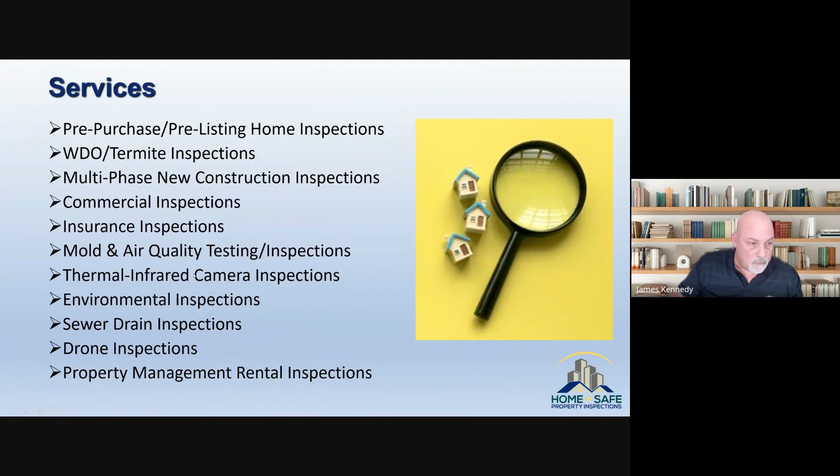All right, just about our services. There's nothing that we can't do or we don't do. If you can just peruse a little bit quickly, everything from home termite to environmental inspections, sewer scopes, drone inspections, property management rentals, as well as commercial inspections.

We have multiple trained inspectors, fully trained staff. So when your clients call us, we are going to educate them on every process: the residential inspection, the termite inspection. We're going to go over what the sewer scope inspection is all about. And we're actually going to go over the wind mitt and the 4-point pretty well in detail, so they have a full understanding how that works.

You're going to get the report back the same day. You can schedule online. We do have weekend inspections if asked early enough, by Thursday afternoon or Friday morning. Our insurance inspections and termites are done by us internally, so we'll get those inspections while we're doing the home inspection. And we do have inspection packages as well. So if there's, and we do home and termite, everything includes the wind mitt and the 4-point, and then we also have health, which would include any air quality, mold, asbestos, lead, water testing, etc.

This is something I wanted to go over with your team, not in depth, but if anybody has any questions on it, they can always reach out to us prior. We do offer now paying at closing for your inspections for the client. We would gather that information up front, a credit card to hold on file, and then we would do the inspection, and the client wouldn't need to pay for anything until closing. We would need to gather information with the closing company, etc. It's a way for the buyers to gain another paycheck or two in between the inspection process and their closing.

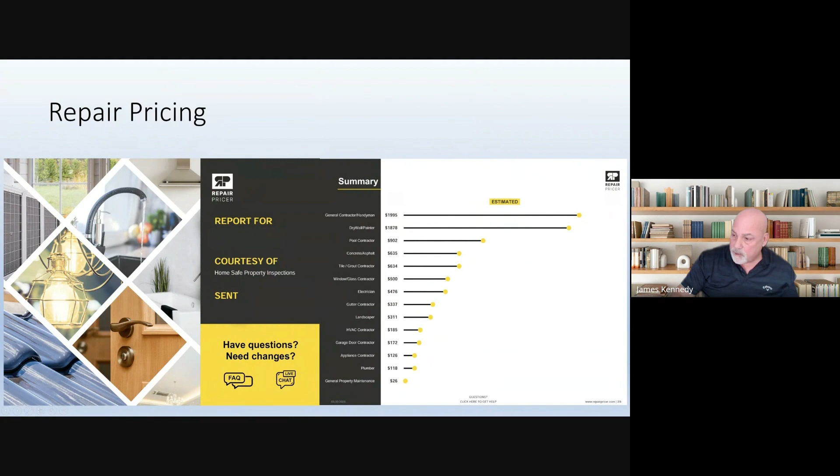As you can see, this home right here is one that we did, and you can see the kind of cost that they're estimated: contractor, handyman, HVAC contractor, general property management, property maintenance, and then a little bit more detail in that. You can check and choose and select what costs you want to share with the buyer. It's a really cool thing we've been offering for the last 6 months, and I've gotten pretty good feedback on it. This is the total here, $6,635. You can choose out the things that you think need to be addressed and leave out the others.

All right, home inspectors, let's start off with this. We're going to go over what home inspectors are required to do. It goes through DBPR, and we do need to be licensed. What does it take? It's going to be 120 hours of class and then a test. There's obviously a lot more studying that needs to be done in between, but that's really it.

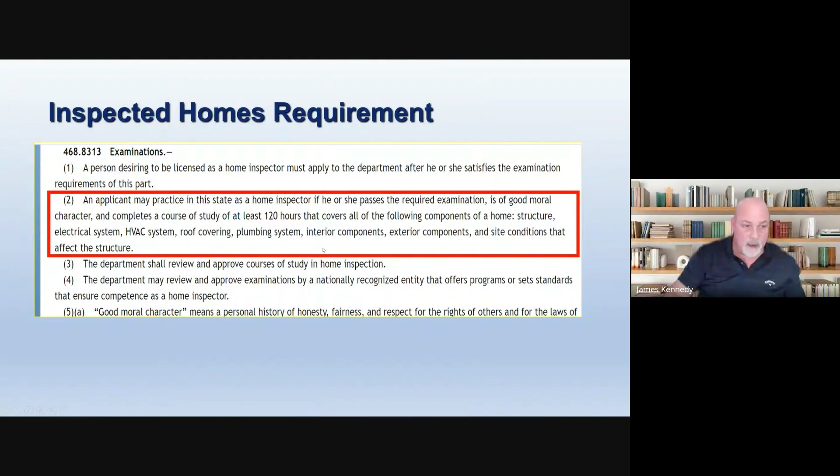So you can see once they pass the examination, fingerprint test, and do the 120 hours, it's going to be all about the components within the home inspection that we would do normally, and then you can have a license. So if you see somebody with a very high license number, you'd be looking at what they have done in order to complete their testing requirements.

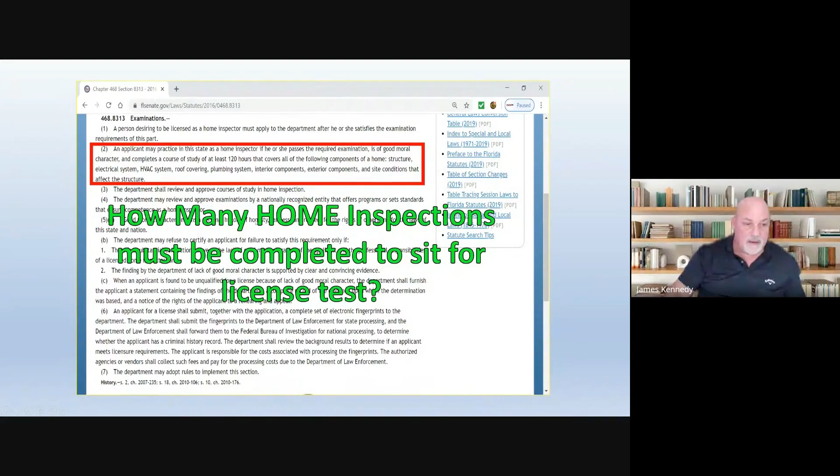So how many home inspections must be completed to sit for that license test? I guess you can all guess now—it's zero. So you may have somebody that could be very low in their pricing, and this could be the reason why. You don't want them practicing on you. You want to make sure you have a professional that has experience and has done many inspections.

Also keep in mind you may have somebody doing this as a part-time job, focused on insurance inspections rather than home inspections. You need to keep that in mind too. If they're working on their own, we know there are a lot of inspectors out there, so it takes time to build up experience. You definitely want somebody who's worked under the tutelage of a larger company that's given them the opportunity to do 300 to 400 inspections a year over the time they've had their license.

All right, so these are what we're going to go through. This is our table of contents.

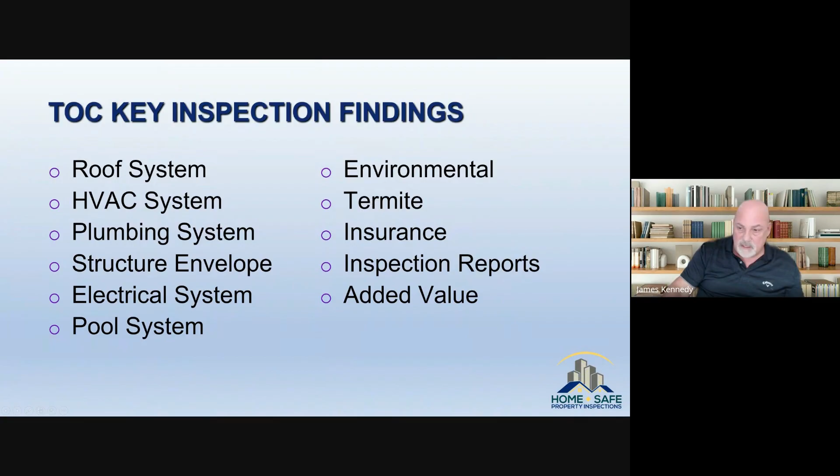I'm going to ask you to pull out your phone and take some pictures of some of the items I have. It'll be pretty useful for researching properties for your buyer to go look at, and it could also be useful for your listings as well. So these are the items we're going to go through. As you can see, there's a lot to cover, so we're going to jump right in.

All right, so for the roof, we're going to go over that. We have fiberglass shingle—to the left you can see the...

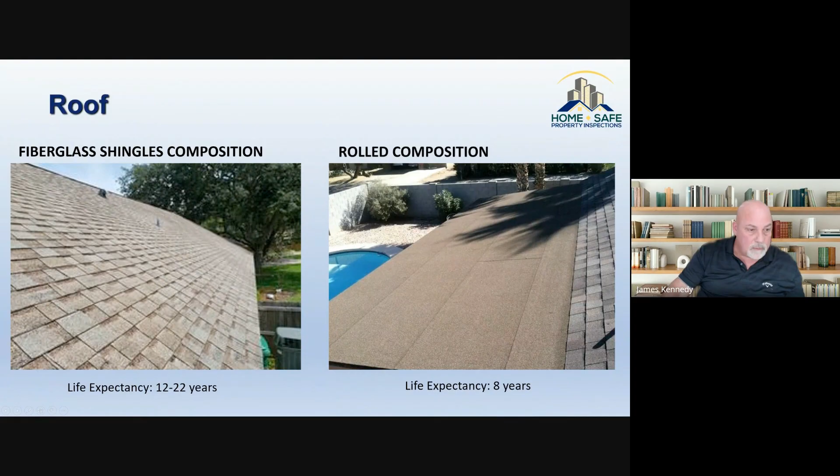Let's see, hold on one sec.

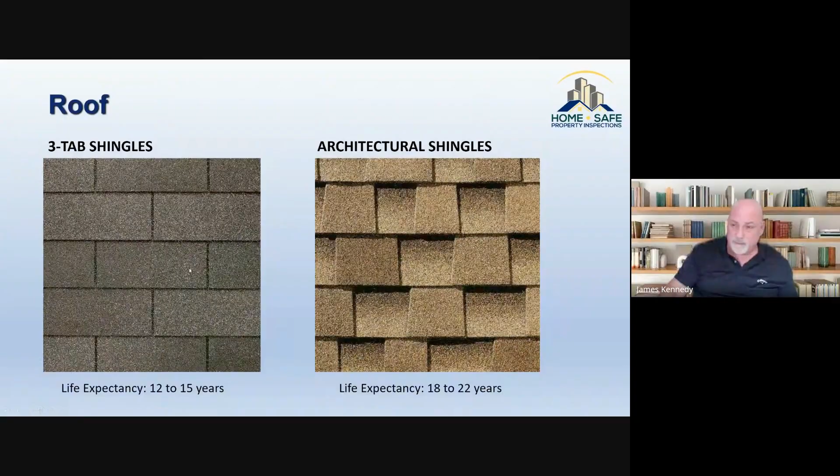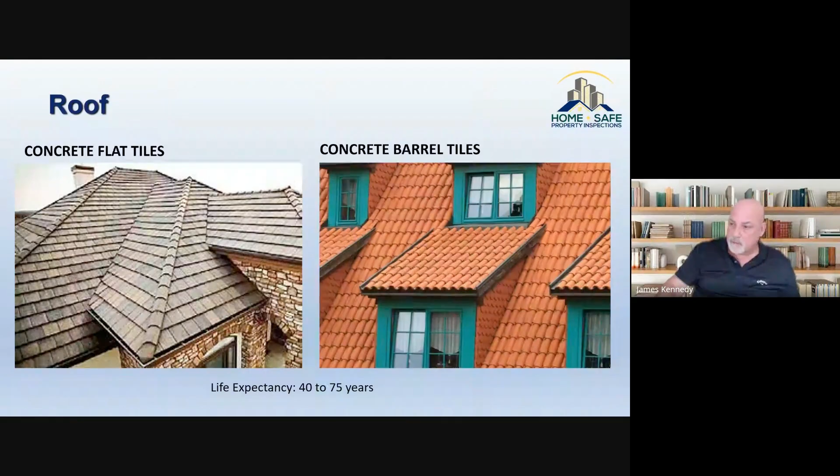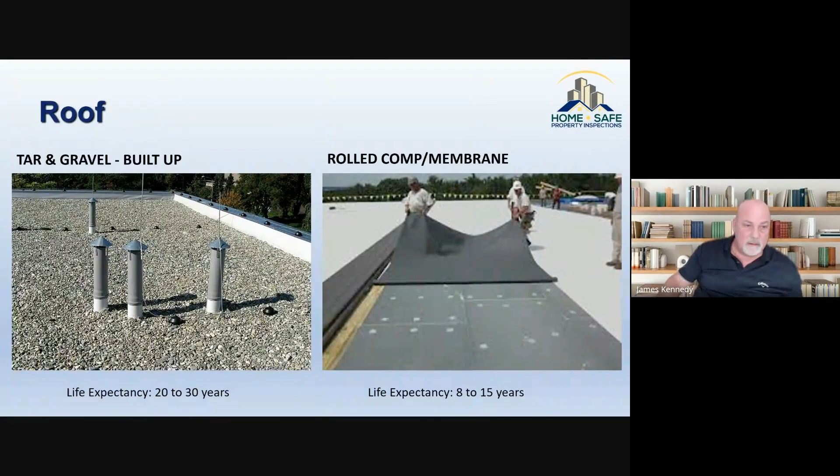Tar and gravel built-up roofing is obviously for more commercial buildings, with a life expectancy of 20 to 30 years. Then we have a rolled comp membrane, with a life expectancy of 8 to 15 years. Both of these would be more common in commercial properties.

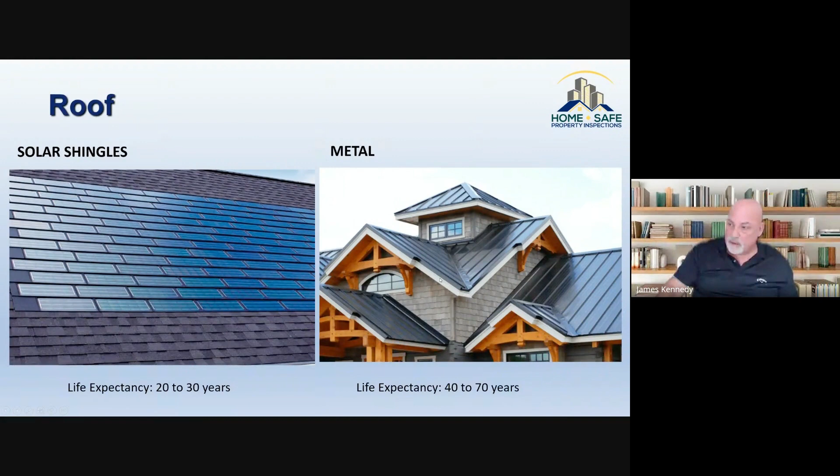Solar shingles, quite honestly, I've not inspected a home with these as of yet, but they are out there, probably more so in your blue states like California. Then there's also the metal roof, which we see much more down here, and that's 40 to 70 years for those, dependent upon the way the building and roof are sloped and structured.

Insurance carriers in Florida are stricter now. Asphalt roofs are often flagged at 12 to 15 years. You're going to want a home that has at least 5 years left on the roof for it to be accepted by the insurance company. But they're even looking a little more in depth at anything under 10 years.

Effective today, Florida now has more stringent requirements for your wind mitigation reports. There's a new report that needs to be used for the wind mitigation. Definitely make sure that if you have any inspections going out this week or next week, or even if you don't have anything for another month, the inspector you're using is using that new form. You don't want a hiccup at the end when you least expect it.

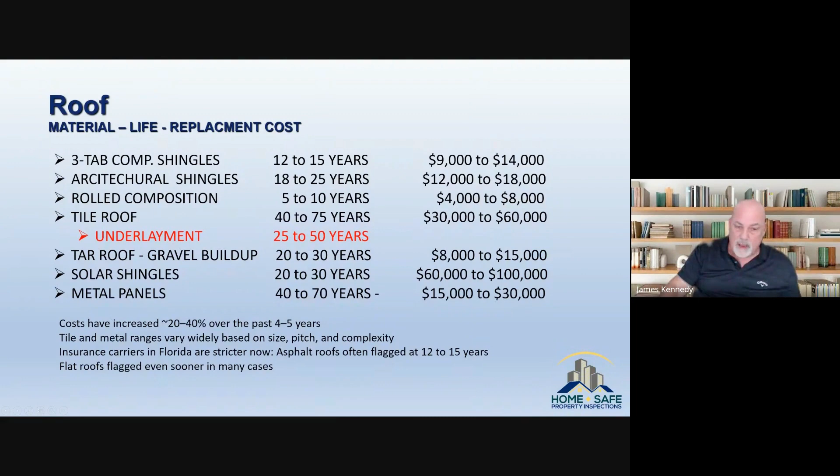So SWR, secondary water resistance, they're going to want to see documentation for that, or at least some kind of picture. Your secondary water resistance goes in between your decking and your roof covering, and it's very difficult to see. You actually have to have a little bit of a gap somewhere in the decking where you can see it, and you can stick a ruler in there to make sure it's pliable, that it's actually sticky.

Wind mitigation inspections - I'm sure many of you have plenty of these because you need them pretty much all the time. The discounts are going to be based on the roof age, not the condition. That's why they're going to require a roof permit date.

The length of the nails - they want 8D nails. When the inspector's in the attic, they're going to be looking for what they call a shiner, which is a nail that missed where it was supposed to hit. They're looking for a measurement of that to be 2 inches beyond the decking.

Spacing of the nails at the edge and the field of decking - those are going to need to be measured. They have to be measured out now, at least 4, in the new wind mitigation requirements, and they need to be 6 inches apart or less.

One of the biggest discounts for the wind mitigation report is the type of roof-to-wall connections. Older homes would have a toenail, newer homes could have clips, and now they'll use a single strap or double strap. There's certain requirements for those as well - they're going to have 2 nails on one side of the strap and 1 nail on the other side.

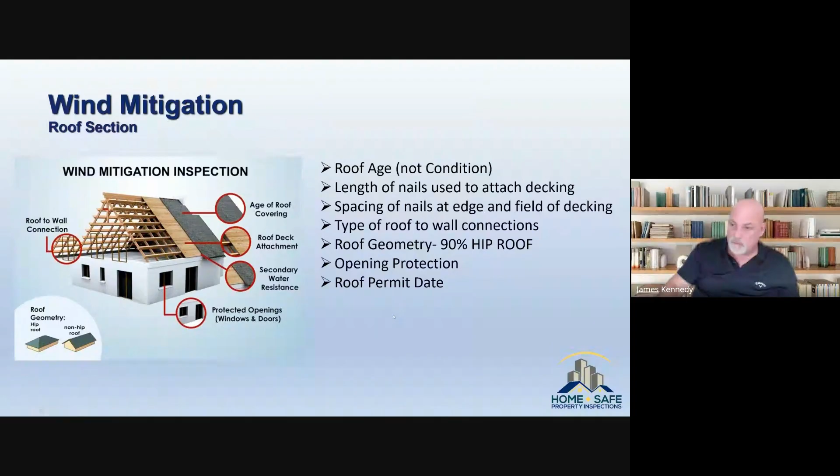Homes built after March of 2002 typically receive multiple premium discounts. That's when some of the codes changed. When a lot of the insurance companies were going to be leaving Florida, they came upon an agreement to use this wind mitigation report to allow for a variation of pricing for residential insured.

Homes older than 1965 typically will not receive the roof to wall attachment. That means it's not really secured with a clip or straps, and it actually gets downgraded to what we call a toenail, which represents just having 3 nails on the side of the truss into the wall - which was just the way they did it back in those days.

Homes between '65 and 2001 have about an 80% chance of receiving some sort of a premium discount. Average savings to expect are somewhere between $500 to $1,000, and that's in each of the 5 years that the report is good for. So the wind mitigation report is good for 5 years. Your 4-point is normally good for 1 year.

Any wind mitigation reports provided to you - if anybody has a sale that's probably going on right now, if it was prior to today, that will be accepted. But anything from today moving forward will have to be on the new report. So please keep your notes. If you have any inspections going on, make sure that inspector is aware.

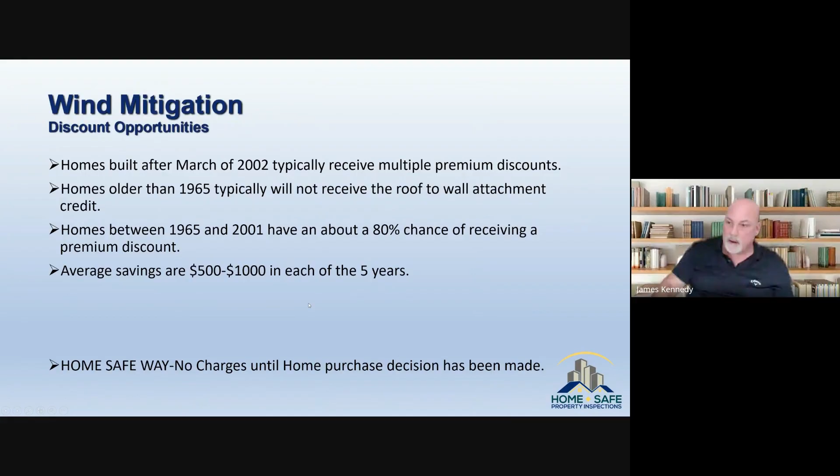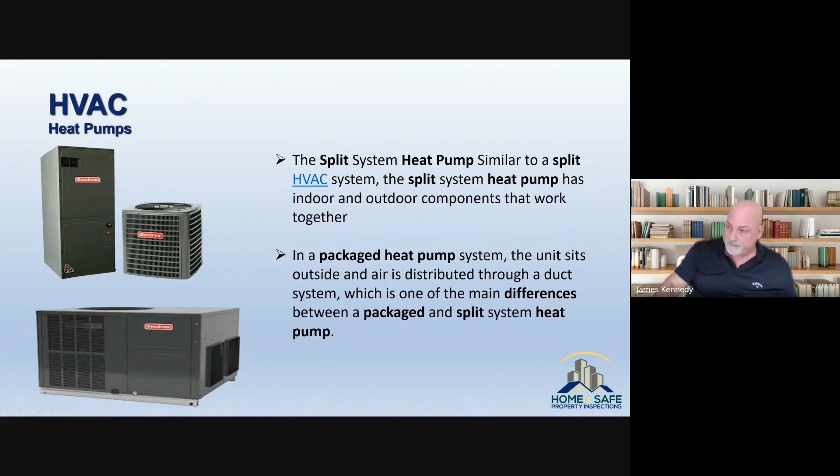New units do not last as long as they did back in the day. You've probably heard of Trane. Nothing stops a Trane. Some of the Trane systems can last up to 20-25 years. Replacement for these are around $6,000 and up, depending on the size of the home and the quality of the unit.

Heat pumps installed prior to 2009 require a coolant pipeline to be replaced due to the new coolant requirement. This was probably more important 3, 4, 5 years ago. Now, prior to 2009, we're looking at systems that are 10 to 17 years old, so we're getting to the point where these systems are already going by the wayside and being replaced, so it may not be as important at this time.

Minor issues and repairs begin at the 8 to 10 year mark. When we're looking at a unit, we're usually giving it a 10 to 12 year lifespan, anticipating 10 to 12, maybe 15. Anything beyond 15 years would be considered good fortune that it's still operating.

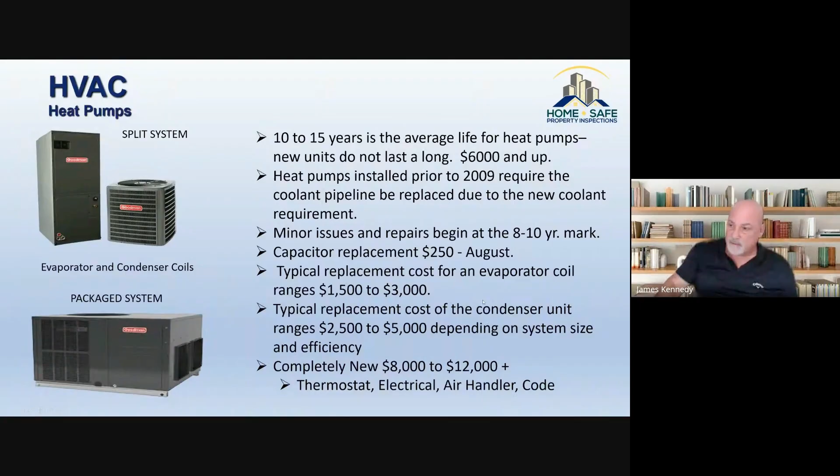All right, so now we're going to go into plumbing, and we're going to go over pretty much all the plumbing for supply lines, and then we'll go over drain lines as well.

Many of you have probably heard of polybutylene, which was used quite a bit from 1978 until 1995. Some of it did hang over past 95, 96, 97. You could have a home that has polybutylene in it. Most of these have been changed, but individuals who've owned a property prior to and are just selling it now may not be aware that the home has it.

So even if it does get replaced, there could be some kind of issue in that wall. As inspectors, when we see polybutylene, we look to see where it's being supplied to, and we look for any kind of damage or moisture issues before we leave that inspection. You're not going to know it if the seller's replacing these - they're going to take the wall down and change that drywall, but what's behind that drywall inside the framing could be ugly.

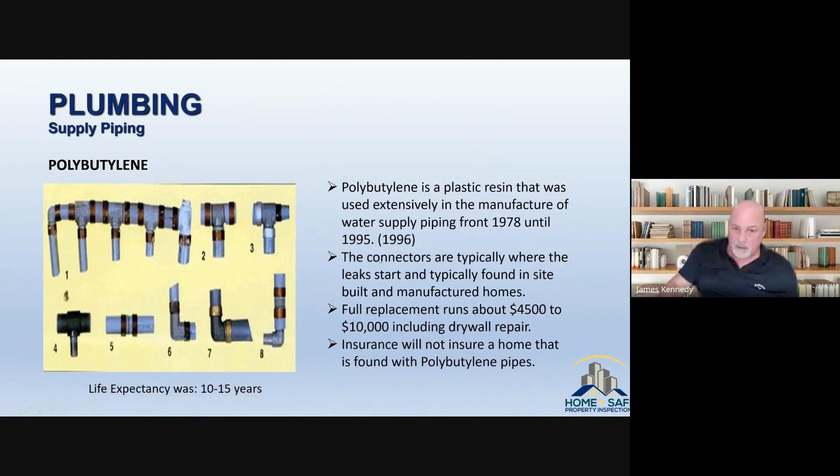If you went back probably 5 years ago, some insurance companies would insure it on the promise that it was going to be taken care of once the buyers moved in. That's not the case any longer. Same thing with electrical panels - there's really no leniency with the insurance companies these days.

All right, CPVC - it's high temperature plastic, invented for both potable cold and hot water in 1959 by Genova Products in Michigan. It's been used extensively in fire sprinkler systems since 1985, and it's also used for many industrial and process piping applications.

It can, over time, become brittle and susceptible to cracking. Life expectancy for this is around 50 years.

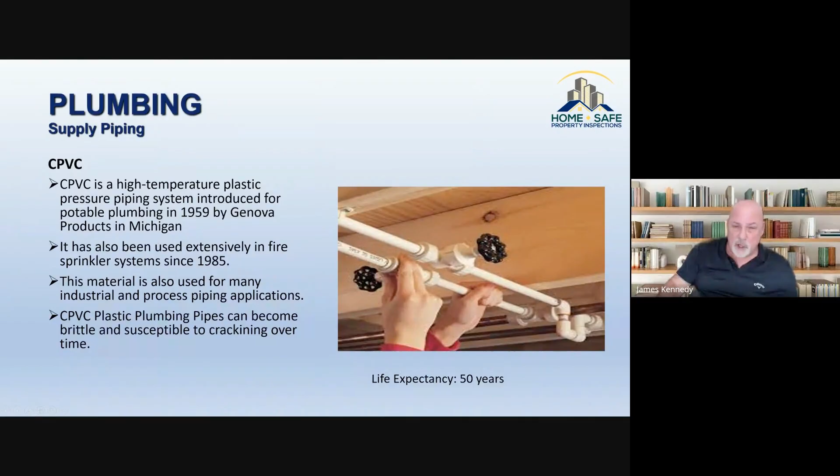All right, we'll have a chart at the end where you can take a photo of all those life expectancies.

Copper pipes, commonly used in the construction industry for supply lines and refrigerant lines, can be manufactured as soft or rigid copper. They offer excellent corrosion resistance and reliable connections. Life expectancy for these is 40 to 60 years. Eventually, they can get little pinholes in them as well.

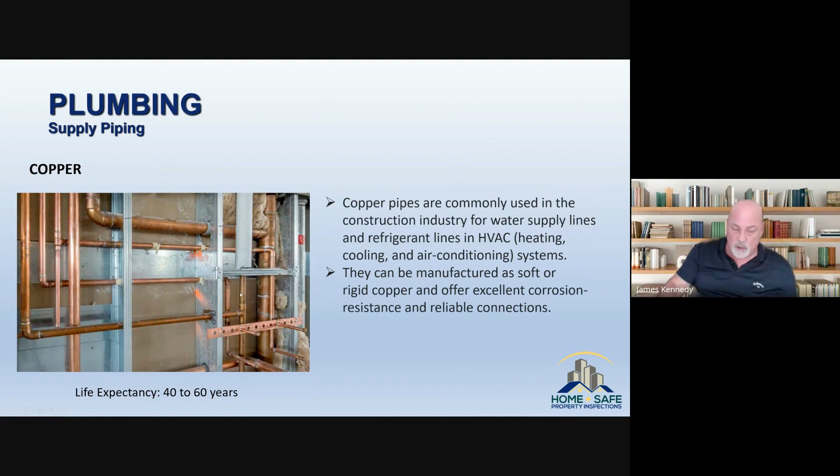So it's something to keep in mind. The inspector is usually going to give somewhere like 40 to 50 years. Anything installed past 1980 may be a concern, but a lot of times by that point, many of those homes have been repiped.

In the U.S., PEX has been used for radiant flooring earlier, and in the 1980s they started using it for potable water, becoming very prevalent in the mid to late 1990s. Life expectancy for PEX is 40 to 50 years.

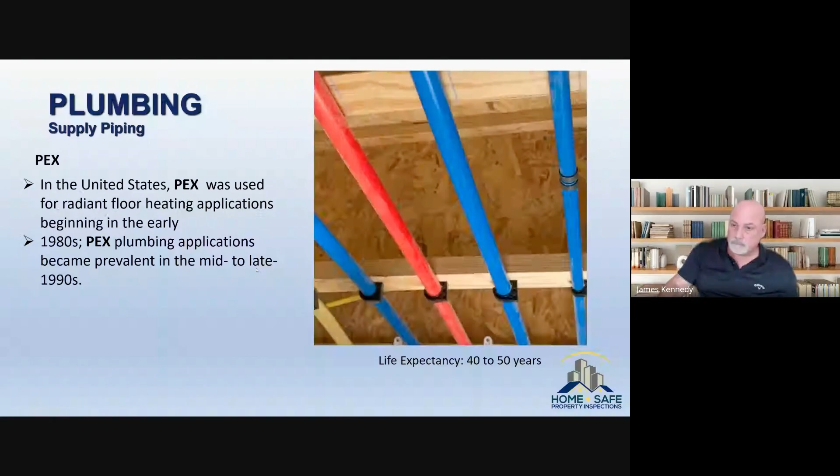All right, so galvanized steel plumbing pipes. These are made of steel, coated with zinc. They actually go through a bath - they form it, dip it, coat it with zinc to help prevent rusting, which is good for the exterior of it.

But as our next photo will show, on the interior there could be some issues. Life expectancy for these is 30 to 60 years, and these were commonly used in homes prior to 1950. It's probably used until the late 1960s.

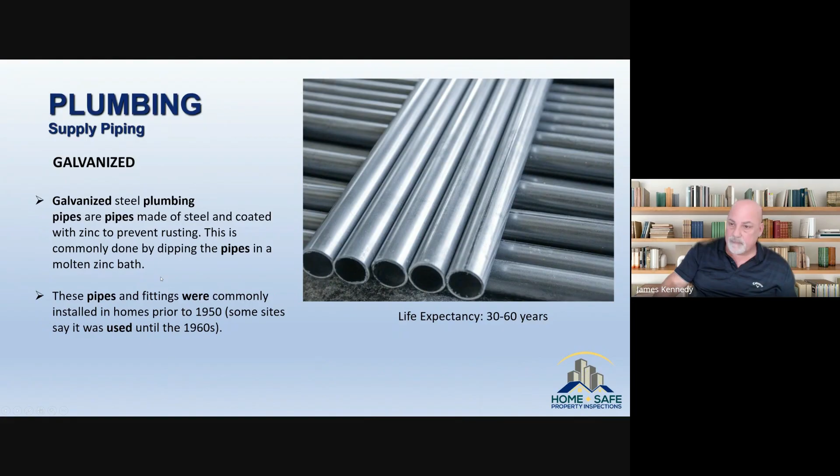Over time, the galvanized pipes can begin to rust and corrode on the inside, as you can see on the right-hand side. This was a situation where two different metals combined with each other in a chemical reaction - you had a copper line with a galvanized pipe, and you can see the corrosion that developed on the inside. It's not very visible because of the zinc on the exterior, but it could affect the water flow.

If you see varying water flows in different pipes or different areas of the home, it's something to consider and think about. Eventually, it could cause a rupture, and it could cause issues with flooding.

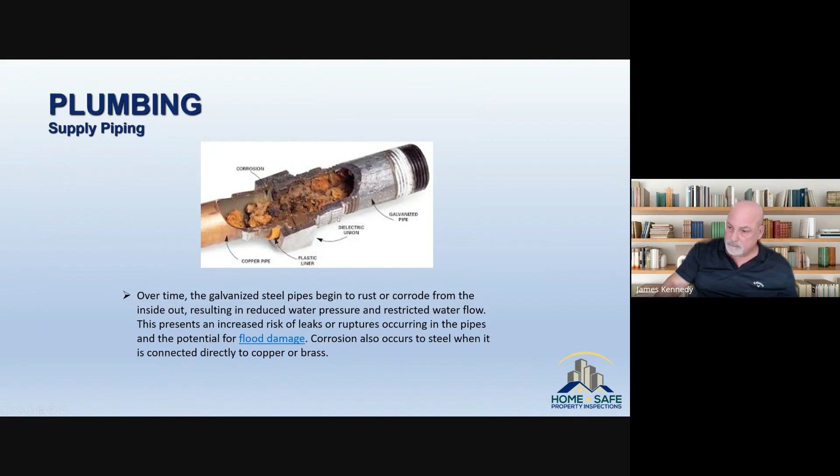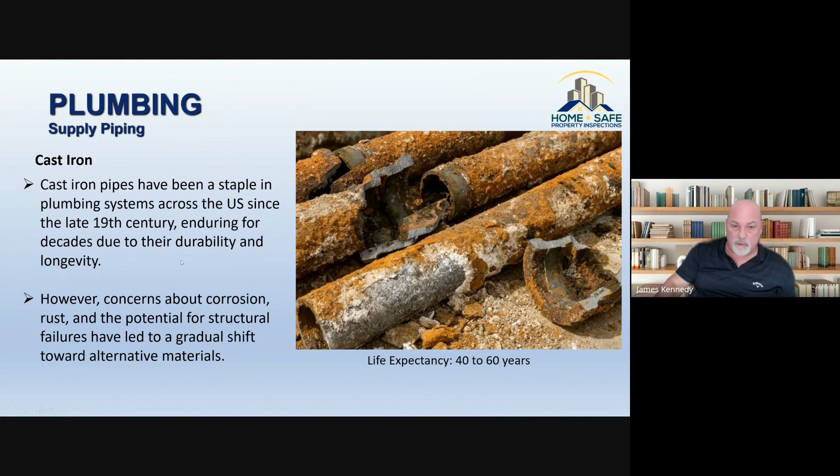And how we find that - for any home we see that's built in 1978 or earlier, we're going to recommend that a sewer scope inspection is provided. It's a tool with a camera on the end, put into the drain lines going to the road, checking the sewer line and also the drain lines underneath the home.

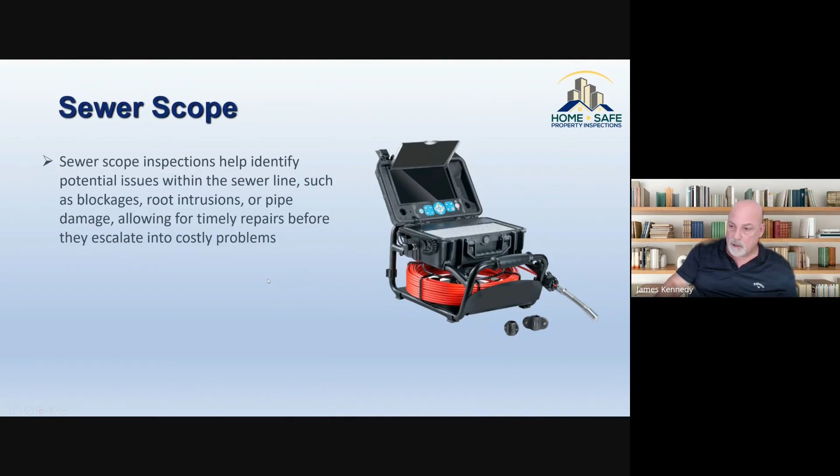Issues happen when the piping gets placed down - it looks great when the plumber leaves. However, they cover it with soil, and then they come put the sod on later, and they'll crush the pipe. It may not be a problem right away because you've got the soil going on, but it's eventually going to leak. And even if it doesn't, if it's just a cracking, roots from bushes, trees, or grass can grow in, and you basically have a great provider of fertilizer for those roots to continue to grow. We'll see a picture of that as well.

This is a blockage or obstruction that we've seen. Two weeks ago we had a golf ball in one of the sewer drains of a new construction. We've also seen dish rags and other things as well. I've seen joint compound used for drywall poured down the sink that got as far as the drain. We've seen balls of tape in the drain. I've seen a beer bottle upside down in a clean out.

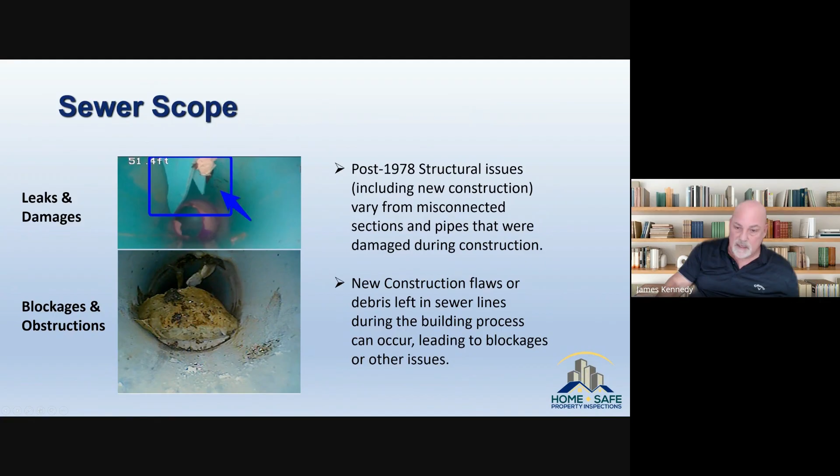So I definitely follow through and try to get those done as often as possible. I have 2 or 3 agencies I do business with, and they make sure they recommend it to every one of their buyers, and we'll actually run it. If the home is on septic, we'll still take it. If there's a clean out available by the septic, we'll put the sewer scope up underneath the house and check those drain lines coming from the bathrooms, the kitchen, and the washer and dryer in the laundry room.

Up on top, this is an example of root intrusion—roots that are growing in. On the left, on the bottom, this is an older home.

This is either galvanized or cast iron piping. You can see it's got some rust going on. This one's actually not that bad—it's still not going to affect the flow. I've seen them much worse than this, and it's not a deal breaker.

What needs to be done is it can be descaled. They can run a pipe down and run a rooter blade, and it will chip away at this galvanized piping. It may end up causing a problem, like a break in the line, but at that point it's just a repair, not a replacement of the lines altogether.

Cost for this could be anywhere—if you're going from the main house out to the road, it could be anywhere from $5,000 to $15,000, and underneath the house could be even more expensive.

New construction home in Sorrento last year was purchased. A sewer scope was not provided. They thought the toilets just weren't getting enough water going through the drains, but actually the piping wasn't connected correctly, and there was a lip causing a problem. It ended up having to have the tile floor taken up, and the cement had to be broken in order to get to the pipes and do those repairs. That was a $900,000 house.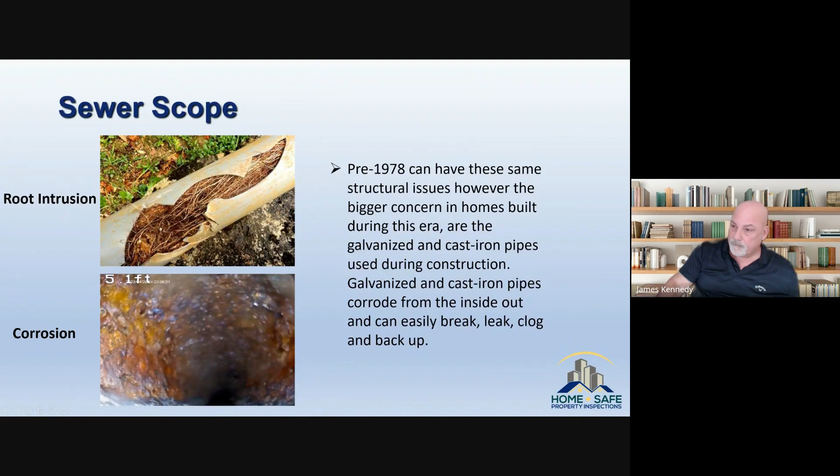I saw somebody was asking how they can determine polybutylene. You're basically going to be looking for those copper connections. It's going to be a gray pipe, usually a different color than your PEX, but there is writing on it. If you go up closer, you can see writing that would help you determine it. And if you ever have any questions, take a picture of it, get the writing on it, and send it to me in a text or to the business email, and we'll evaluate it and let you know right away.

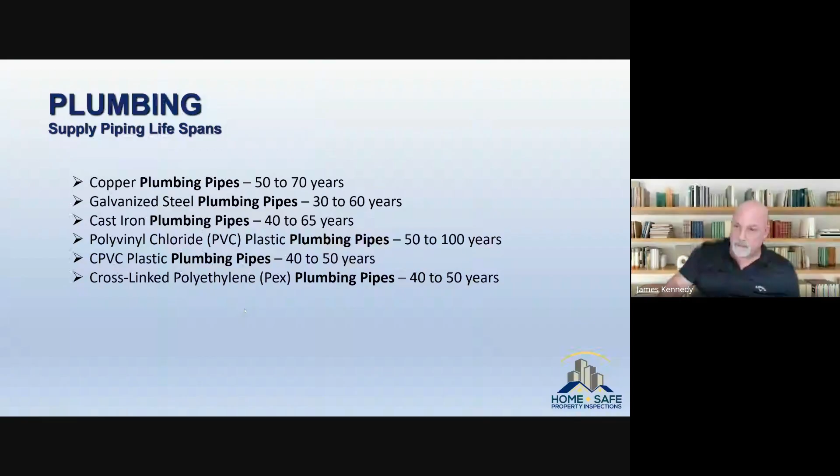As a home inspector, every time we see something like this we're going to recommend both have an evaluation by a licensed professional structural engineer. If we see something that's 1/8 of an inch thick or less, about the thickness of a nickel, the recommendation is to go ahead and repair it with unsanded grout. Anything over that 1/8 of an inch is where we ask for a professional engineer to evaluate, and other things may come into consideration.

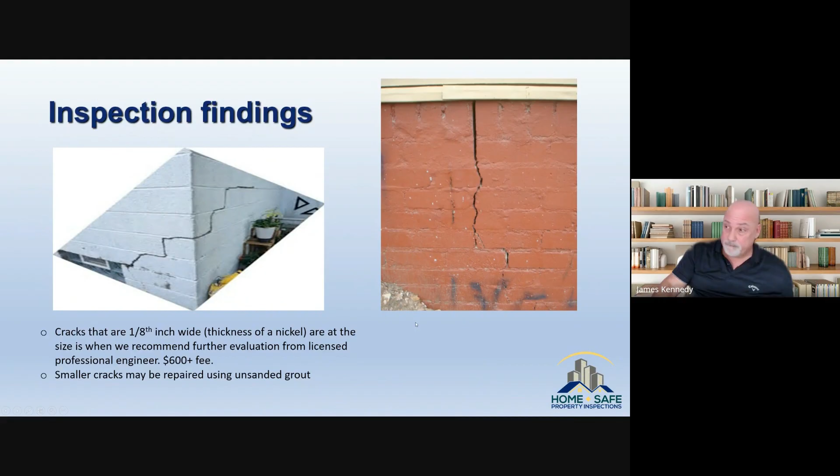One consideration is the age of the home. If we see something right at the 1/8 inch mark and the home is 50, 60, 70 years old, it may not be as important, and we may not recommend it gets reviewed by a structural engineer. But if it's 15 or 20 years old, we're definitely going to give that recommendation. That fee is usually around $600 to $700 minimum for about 40 minutes worth of work and a report.

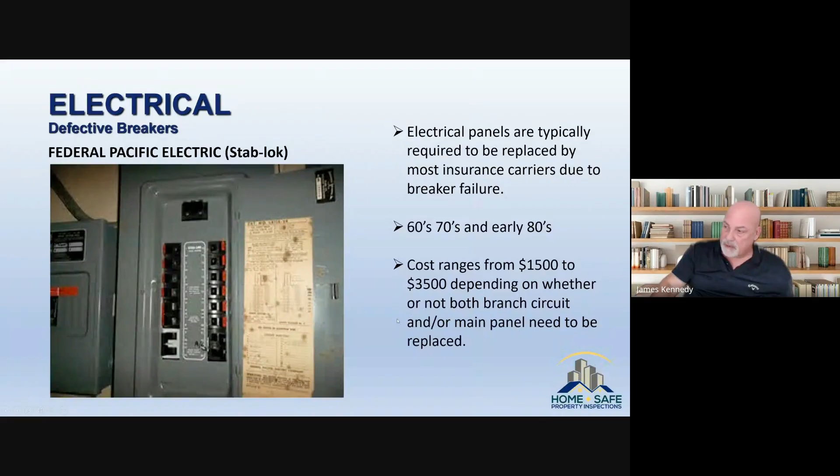In this picture right here, we see the Federal Pacific Electric panel, also named the Stab-lok. These were required to be replaced by insurance companies due to breaker failure. They were used in the 60s, 70s, and 80s. Cost for repairs can range anywhere from $1,500 to $3,500, depending on whether the branch circuits or the main panel need to be replaced. At this point, you're better off just changing out the whole system.

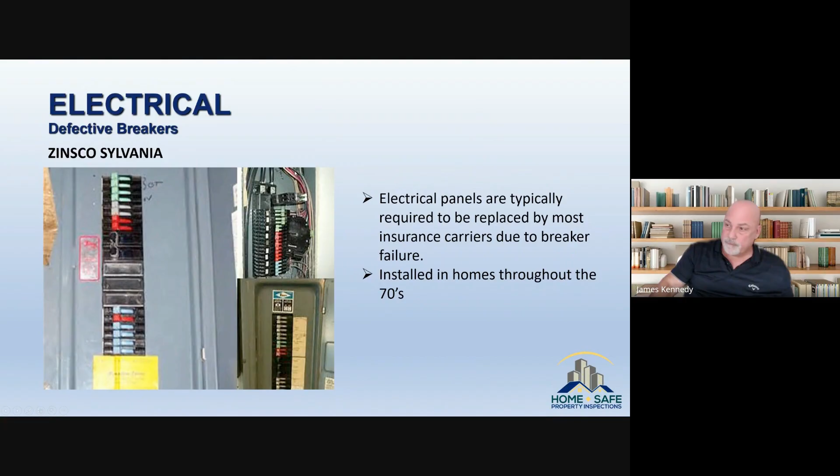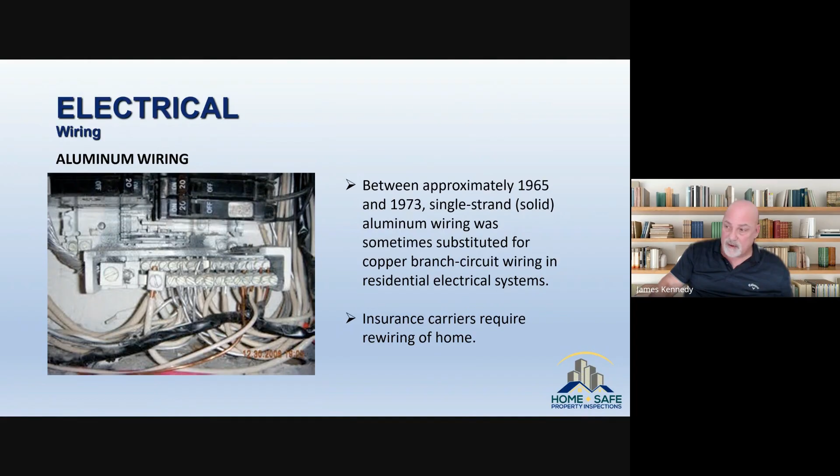All right, single strand aluminum wire was used from 1965 to 1973. Sometimes it was substituted for copper branch circuit wiring. Insurance carriers required the rewiring of the home, or for it to be fixed, they need to have these alumiconns placed on it, either in the electrical panel or at the outlets. This is usually connected to your light switches and outlets, and initially it was established that it was causing some issues.

The aluminum wiring is very soft and loosens up over time, and then it doesn't allow the connection to be as good as it could be, and it can cause a fire. These alumiconns take that single strand and hook it up to another wire, which eliminates that issue. And this will pass your insurance. Okay.

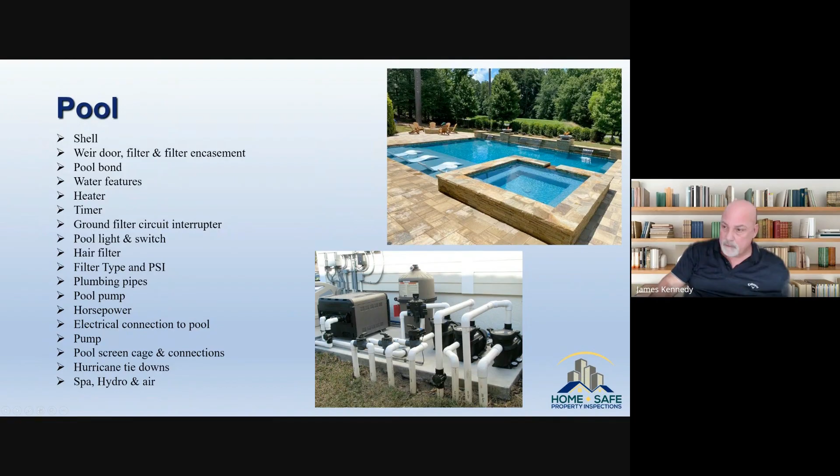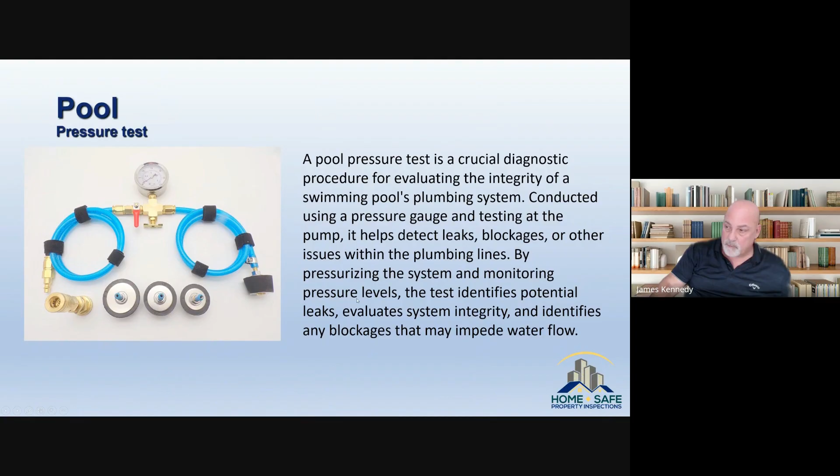This is something we've been doing the last 2 or 3 years. We check the pressure of the supply drains as well as the skimmer. We can't check the main drain, but we can check those other 3 lines. It's a diagnostic procedure that will let us know if there's any leaks, blockage, or other issues in those lines. We pressurize the system and monitor the pressure levels, and it identifies potential leaks.

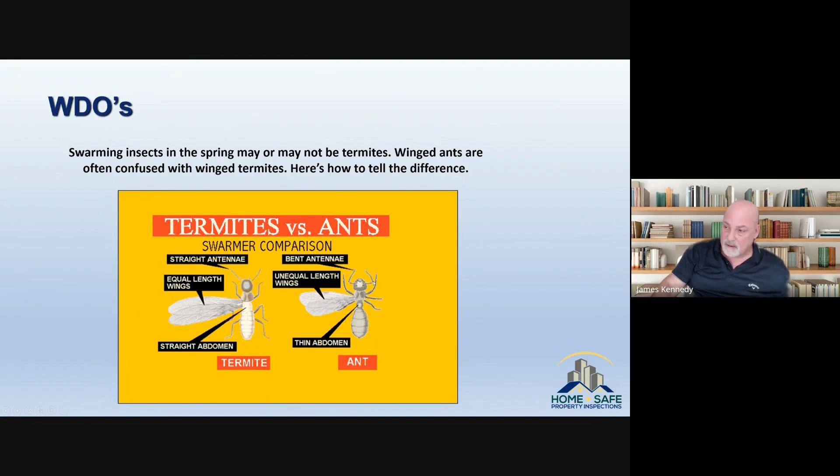We always recommend that you have a licensed professional pest control company come out and look, but some ways of determining it yourself would be a thin abdomen for the ant versus a straight abdomen for a termite. The wings on termites are all the same size on both sides, while the wings on ants are unequal in length. Also, if you can see the live ones, termites have straight antenna while ants have bent antenna. That's the difference between a termite and an ant.

Treatments involve liquid treatments, creating a barrier that prevents termites from entering. There's also, you can have like the Massey-provided Sentricon bait stations. You just want to make sure that there's active ingredient in all those bait stations.

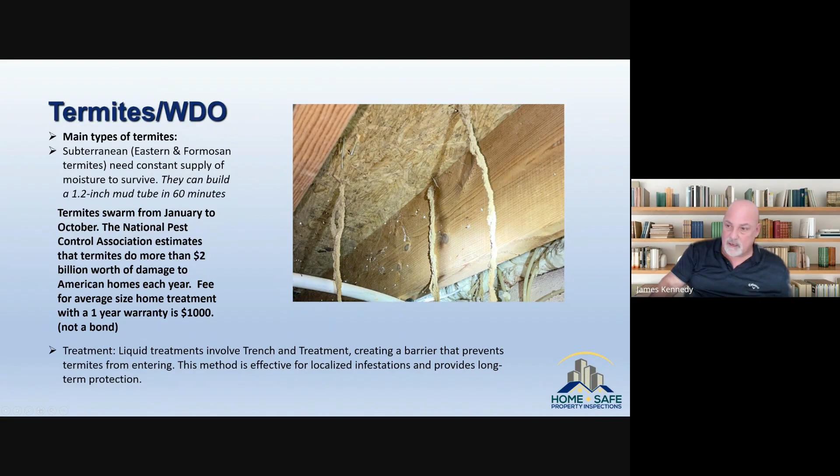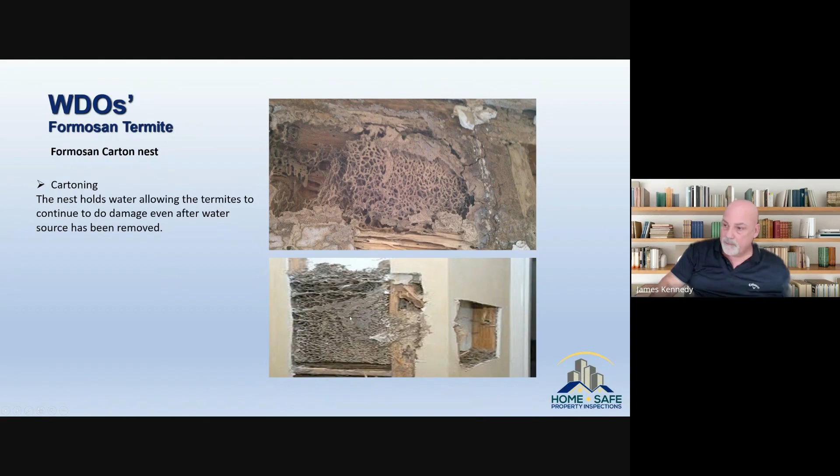This is cartoning. This could be behind the wall. This is from Formosan termites, which came from Asia back in the early 1900s, and they came over on ships. You can see quite a bit of damage, and these can go quite a bit. They hold a lot of water in here, so the termites don't have to go down to the ground as often to pick up water to continue to survive. We call this cartoning, and this is for Formosan termites.

Drywood termites are not taken care of by the subterranean preventative treatments, so the bait stations do not work on drywood termites. The treatment on the outside does not work either. There are 3 ways to treat drywood termites, and you're going to need a responsible inspector to tell you what those are. One is, if it's in a small location and you're pretty sure it's pretty new and hasn't gone to other locations, you can remove the wood that it's in.

If the inspector sees frass on the outside framing but doesn't see any frass in the attic area or crawl space area, then maybe just removing the framing would suffice. If there's termite frass in several locations in the attic, they're going to want to start off differently. If there's just a few areas in a location, there is a foam that can be applied to that wood area - it gets injected into it and will kill the drywood termites.

The last option is going to be fumigation of the home, which requires 3 days of tenting - 1 day to put the tent up, 1 day to gas, and another day to take the tent down. You definitely do not want your buyers dealing with this 3 months down the road after they've moved into the house, because everything that involves eating has to be either washed or bagged up before the process, and they need to move out of the home for 3 days.

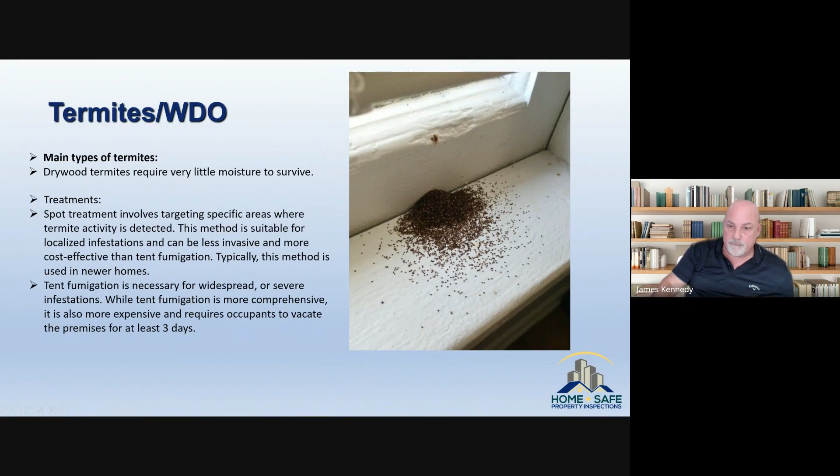Drinking water tests - we provide these. Many of the VA loans are going to require this for anybody who has well water, and some FHA loans will require this as well. You want to make sure that you have somebody that knows what they're doing.

Some things that can give you a contaminated test that isn't really deserved would be somebody not wearing gloves when they're doing the testing and actually touching the water. Another one is not letting the water run long enough before they actually test it. Another is also going to be cleaning the spout itself where the water is coming from, making sure, because that spout could be holding residue or contamination from a long time before.

There are 2 different tests. One is for contaminants and bacteria. The second test would be for metals, including lead, iron, and manganese.

The results of this, if you do the first test only, it'll come back in 24 hours. If you do the second test, the bacteria and everything all together, we call it the VA FHA Plus test, that will take 48 hours to come back.

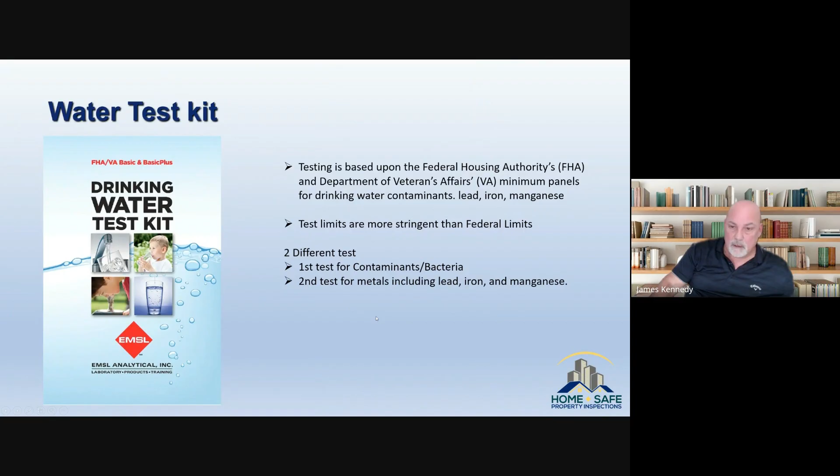Cost for this from the lab is $175 to $200. So the inspector should be along that price line of $425 for a standalone. But if there are a lot of inspections put together, it should be part of a package deal, down to like $375 or $350.

Mold, well, we all know the mold, the 4-letter word. Not everything is an issue. It needs to be checked out by the right individual and determined. There are several ways. I am a licensed mold assessor, which means I've had to perform a certain number of tests, worked for a period of years, and then pass a 4-day class to get.

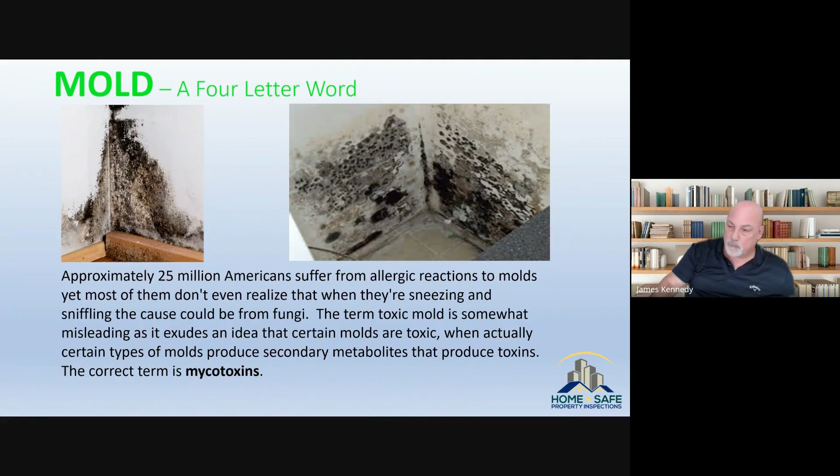You're going to need somebody that knows what they're doing, because a home inspector could come in and do an air cassette and not do a swab, and then determine there's an issue, that there are spores flying around in the air. Well, those spores could be very old. They could be from something that's not producing spores any longer. So we call that non-viable.

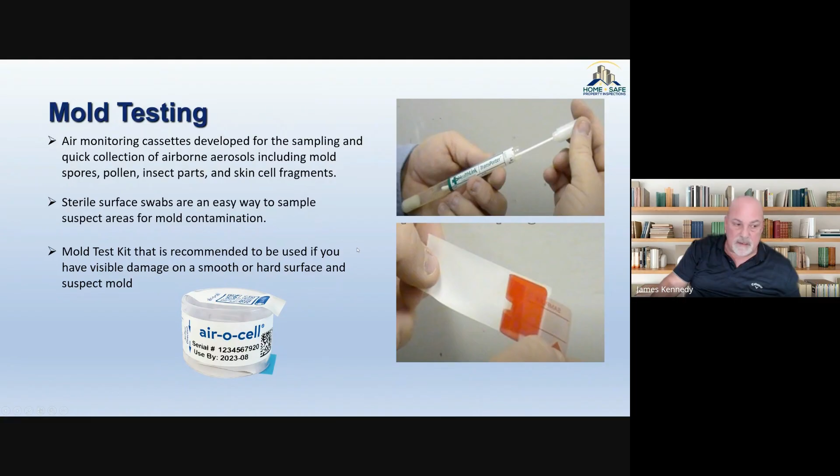The only viable way to do it is with the swab. You need to find a location, swab it, and it needs to go into incubation for 8 to 14 days, to see whether or not whatever's in there is actually something that is live, that is still continuing to grow. Everything else is going to be null and void. It's not going to be concerning.

Lead: homes before 1978 may have lead-based paint. I think you guys all have the lead addendums by now. What we usually recommend for a home buyer is, we're anticipating that there's going to be lead someplace or another. To test every location would mean somewhere around $85 to $100 after your initial exam, for every wall in the house with different paint. So it's kind of exorbitant, and really not cost effective.

So what we recommend is to ask them first whether or not they're going to be removing any walls, replacing, doing any kind of renovations or changes, because that's your biggest concern. As long as everything is completely covered, with no chips coming out, it's going to be okay, until you get to the point where you're removing it, pulling it apart, cracking it, or running a saw across it and creating dust. So we go over all that with the buyer when they call, to make sure they understand it.

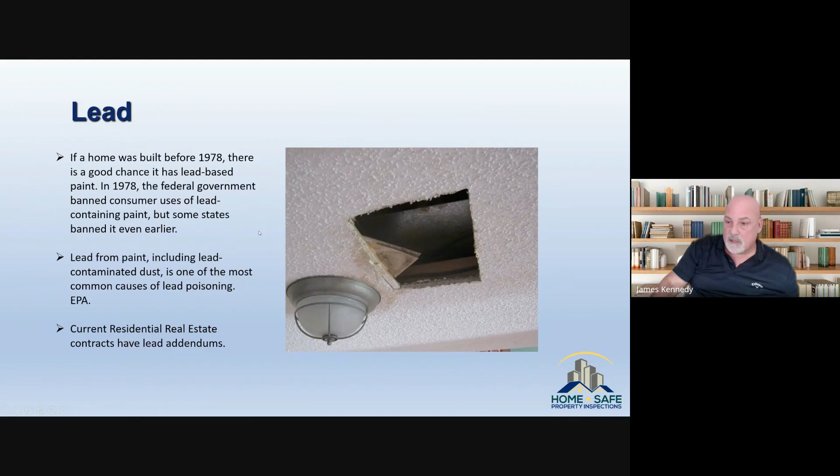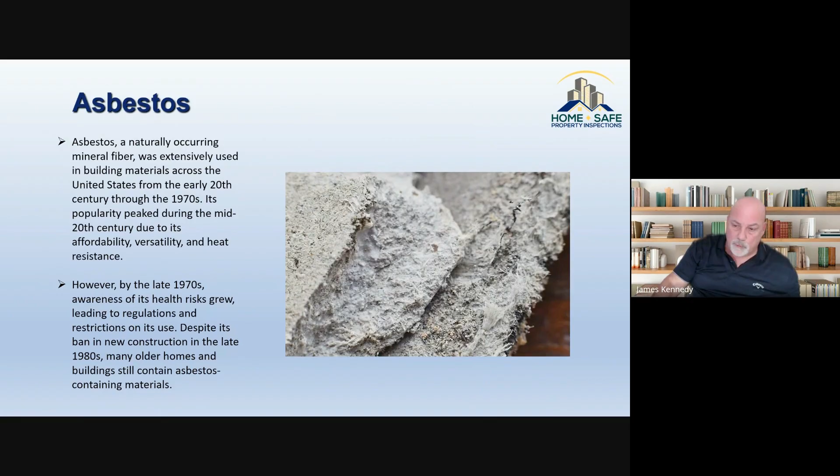Asbestos, similar thing. You're usually going to see it. It was used pretty thoroughly in the 1970s. Popularity peaked during the mid 20th century because of its affordability, versatility, and heat resistance. By the 1970s, it was aware that it was growing as a health risk, leading to regulations and restrictions on its use. It's still being used today, but in a very, very small percentage. Despite its ban in new construction in the late 80s, many older homes and buildings still have asbestos-containing material.

Supra, I'm sure you guys are aware of this. We do have Supra, we offer this. So if we need to get started on an inspection in advance, an hour or something, for you to go ahead and take care of another showing before you come, we do have access to Supra and SentriLock.

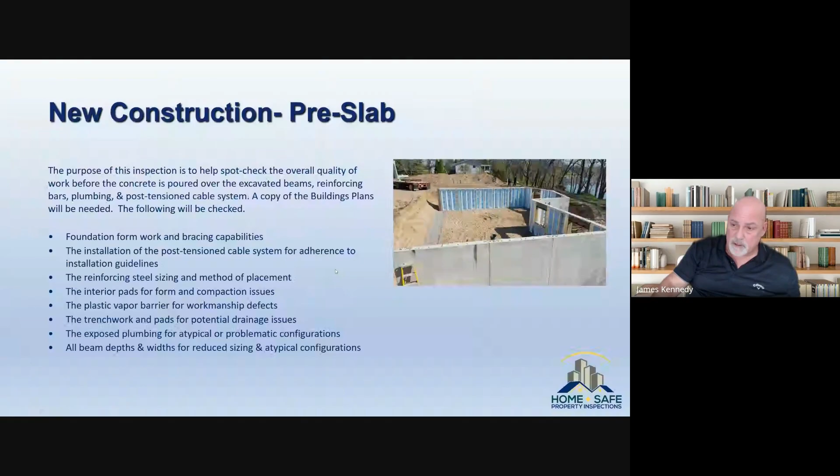We can do that. I'm not going to go through these, but these are just the 3 different phases that we can do for new construction. You have a pre-slab inspection, which is basically checking everything before the initial slab goes down. We'll be checking for termite treatment at that point, looking at the beams and reinforcements being used before the foundation is poured.

Pre-drywall, now the slab is down, but now we can see things that you're not going to be able to see once the drywall comes up. We'll provide this inspection at a discounted rate if it's combined with the final home inspection as well.

Here we want to make sure that the ductwork is connected. We've seen that. We want to make sure that the lumber being used is quality. We want to make sure that there's strike plates put in protecting the wiring, so that once the drywall goes up, there's no nails hitting the electrical wiring causing an issue, and many other things like fire blocking protection. We get to see the rough-in of the mechanical, electrical, and plumbing.

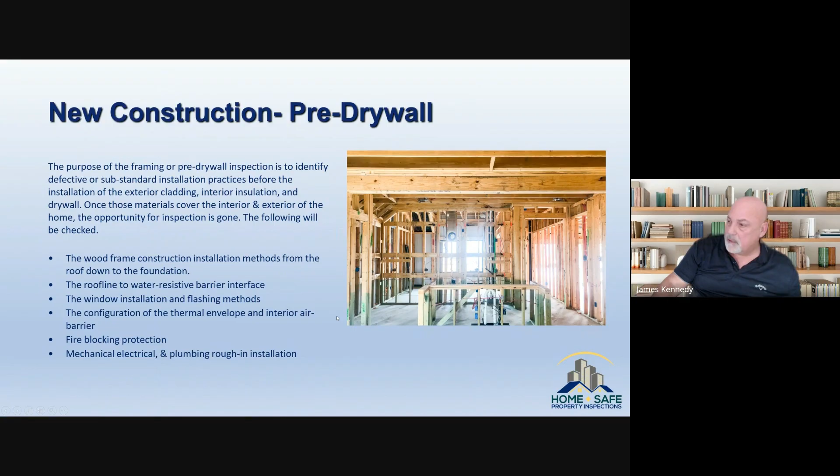All of our inspection reports are going to have an executive summary at the beginning that's going to show the issues, with severity levels of the concerns. This is an example of a report we've done within the last couple of months. As we told you, the wind mitigation and the 4-point, we don't charge for those up front, but we will have notification in this report with a black INS severity level. That's going to notify you, and we'll tell you at the inspection as well. The buyer will be explained this during the initial conversation, that those are issues that are going to be a problem with the insurance company providing insurance. So we let you know up front in your main report, because it's going to be the first thing you really need to address with the seller.

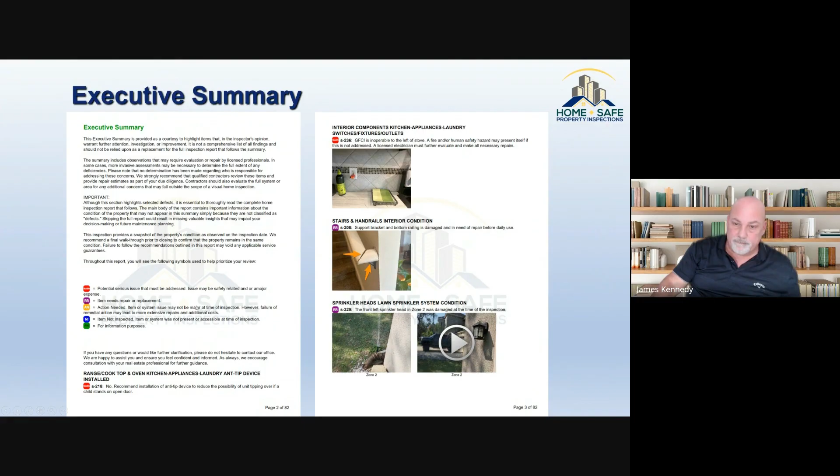Yeah, so that's it, we got through it pretty quick, Ryan. I'm happy because it's usually a 100-minute class. So yeah, I'm very happy with it too.

You got to the questions that were in the chat. I know you got to the PEX question. Saw that one. Let me go ahead and go to the chat now. There's another PEX question, I think.

So the old PEX and new PEX is something that gets called out, usually explained, and it's looked at and evaluated. I don't know if it's necessarily 20 years, but the insurance companies, the underwriters, do recommend some of it. So you have some insurance companies that will accept it, and others that won't. So what does that mean? It means that possibly your rates could be higher. We don't look at 20 years, we look at something like 25 or 30 years.

Okay, fantastic. You guys see Jim's stuff there on the screen, his contact information. I will tell you, Jim did an inspection for, I know at least one for Carissa, on a building she was buying, and he did a great job. She couldn't say enough good things about him. We also did a Dollar General in Tampa for you guys as well, and I know you've done some residential stuff for us as well. So yeah, I really appreciate it, man.